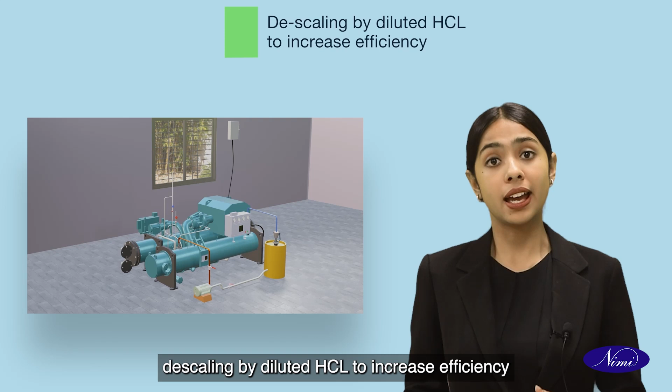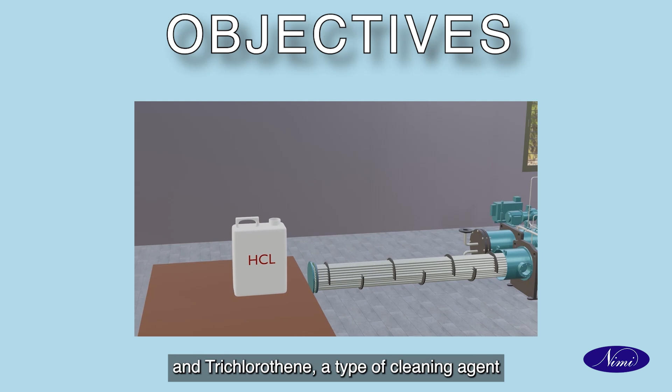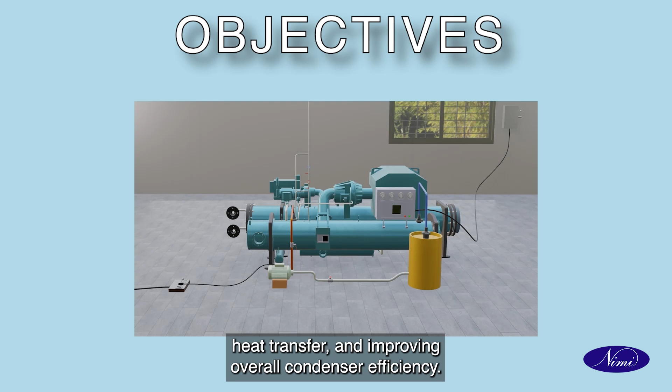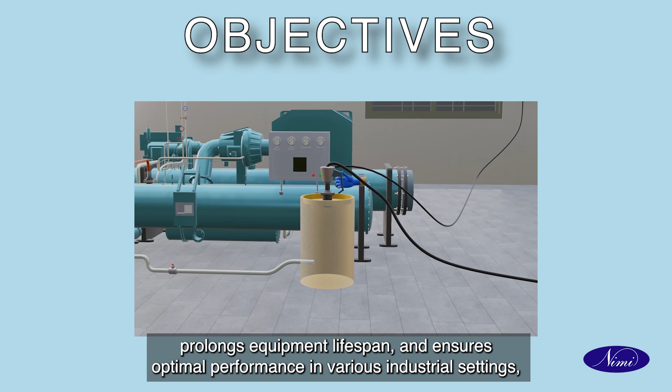Objectives: the objectives of descaling a condenser with diluted hydrochloric acid and trichloroethylene, a type of cleaning agent non ozone depleting in use, are multifaceted. The process aims to remove mineral scale deposits, restoring unhindered heat transfer and improving overall condenser efficiency. By mitigating scaling issues, it enhances energy efficiency, prolongs equipment lifespan, and ensures optimal performance in various industrial settings, contributing to a more reliable and cost effective operation.

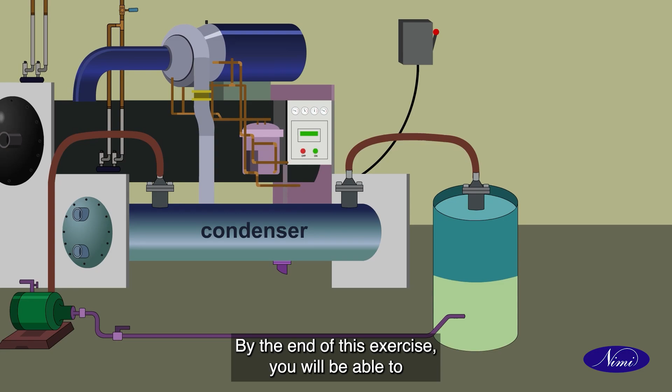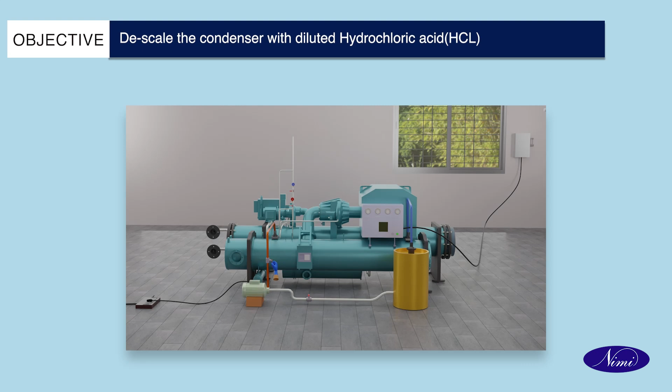By the end of this exercise, you will be able to identify the condenser connection joints, prepare the descaling solution, descale the condenser with diluted HCl, and follow the safety measures while performing descaling.

The descaling process with diluted hydrochloric acid requires a specific set of tools, equipments, and consumables. Essential items include acid-resistant gloves and goggles for safety, acid-resistant brushes for application, and pH testing equipment to monitor acidity levels. Now let us take a look at the tools, equipments, and consumables.

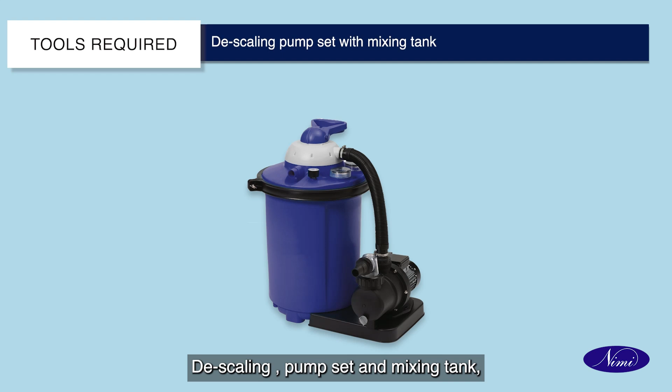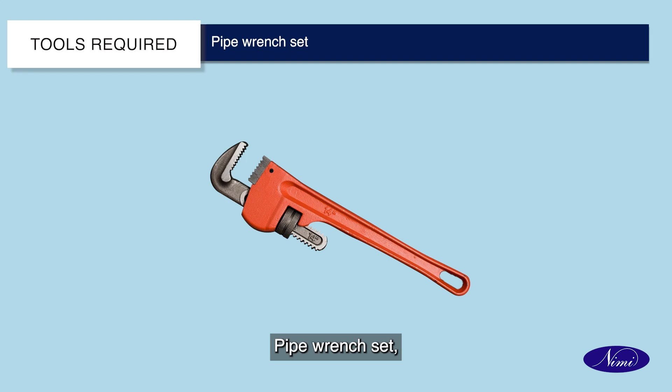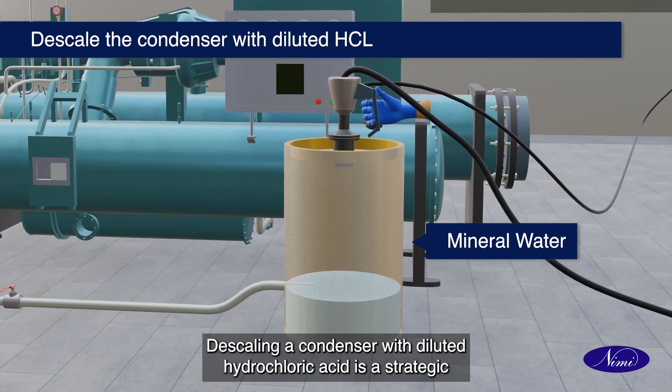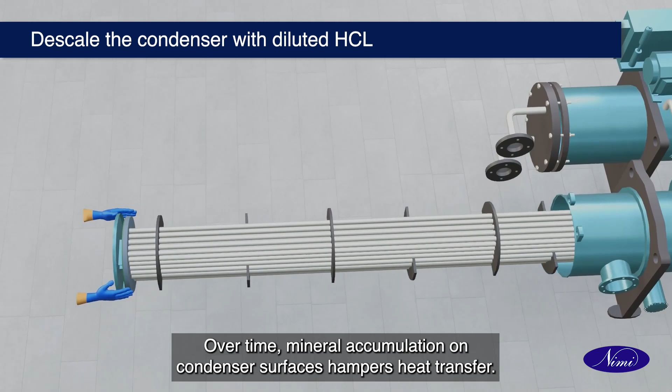Now let us see the preparations needed for descaling by diluted HCl to increase efficiency. Descaling a condenser with diluted hydrochloric acid is a strategic method aimed at boosting efficiency by mitigating scale deposits. Over time, mineral accumulation on condenser surfaces hampers heat transfer, diminishing performance. The use of carefully diluted HCl facilitates the removal of these deposits, restoring optimal heat exchange functionality and consequently enhancing the efficiency of the condenser in various industrial applications.

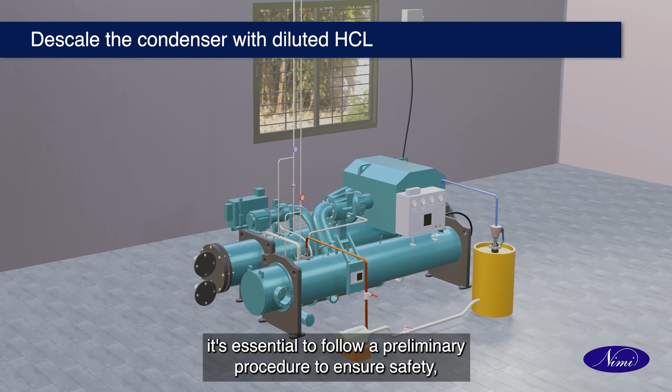Descale the condenser with diluted HCl. Before descaling a condenser with diluted hydrochloric acid, it's essential to follow a preliminary procedure to ensure safety, proper planning, and effective execution. Here's a step-by-step procedure to be followed.

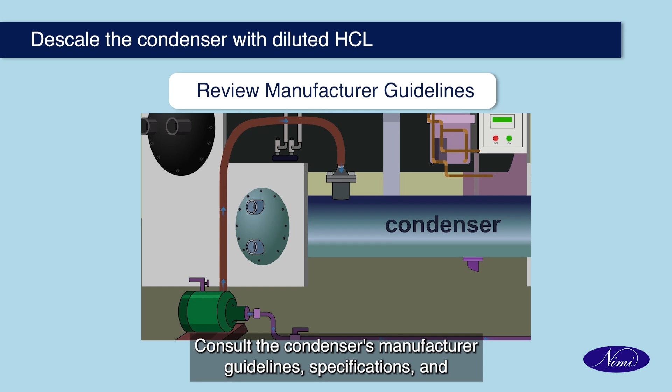Review manufacturer guidelines: consult the condenser's manufacturer guidelines, specifications, and maintenance manual to determine if descaling with HCl is recommended and safe for the specific condenser model. Follow any specific instructions or precautions provided by the manufacturer.

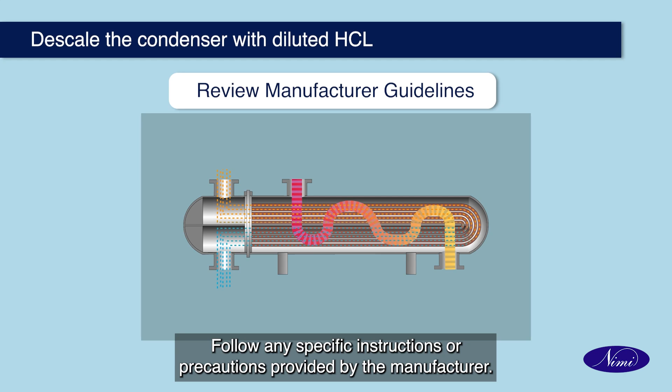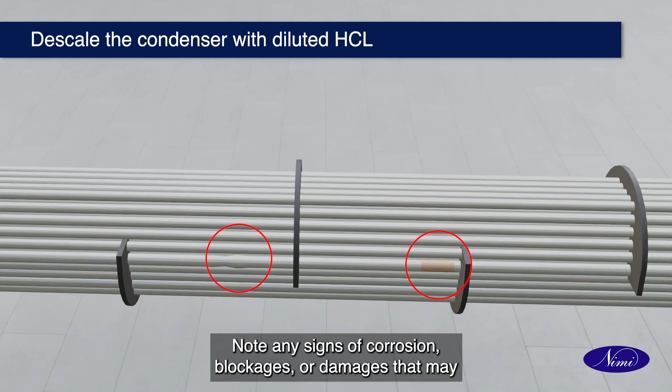Assess condition of the condenser: inspect the condenser visually to assess the extent of scale buildup or fouling. Note any signs of corrosion, blockages, or damages that may affect the descaling process.

Identify materials compatibility: ensure the materials used in the construction of the condenser are compatible with hydrochloric acid. Some materials, such as certain types of aluminum alloys or rubber gaskets, may react negatively to acid exposure.

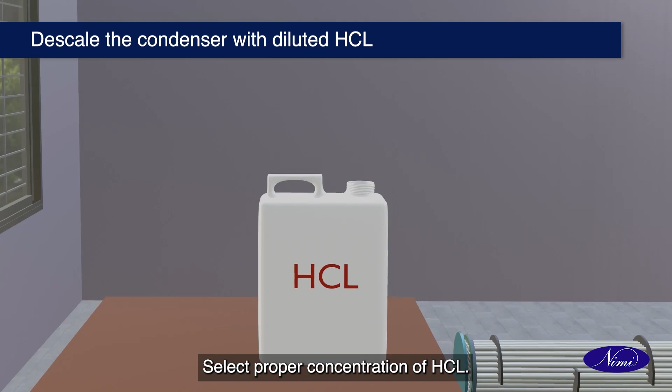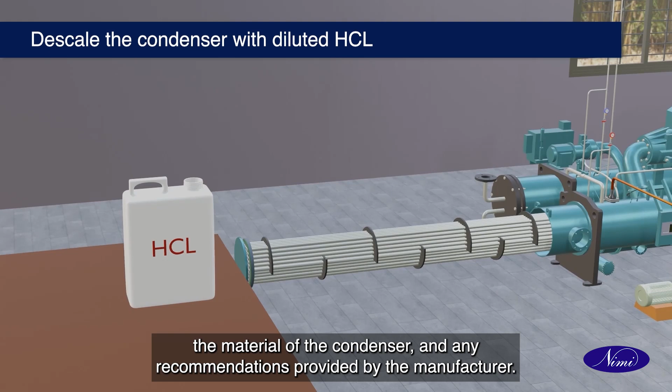Select proper concentration of HCl. Determine the appropriate concentration of hydrochloric acid solution for descaling based on the severity of scale buildup, the material of the condenser, and any recommendations provided by the manufacturer. Typically, concentrations ranging from 5% to 10% are used for descaling purposes.

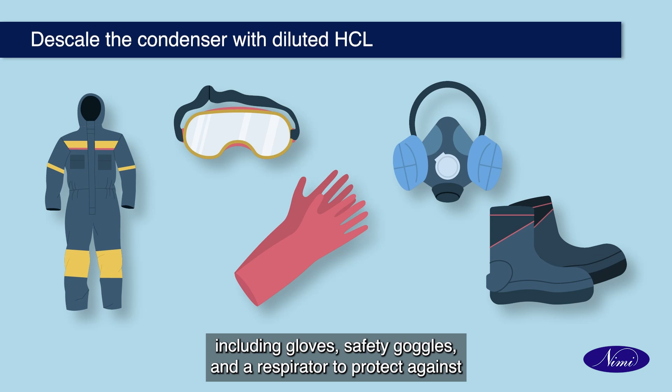Prepare safety equipment: gather and wear appropriate personal protective equipment, including gloves, safety goggles, and a respirator to protect against chemical splashes and fumes. Ensure that emergency eye wash and shower facilities are accessible nearby.

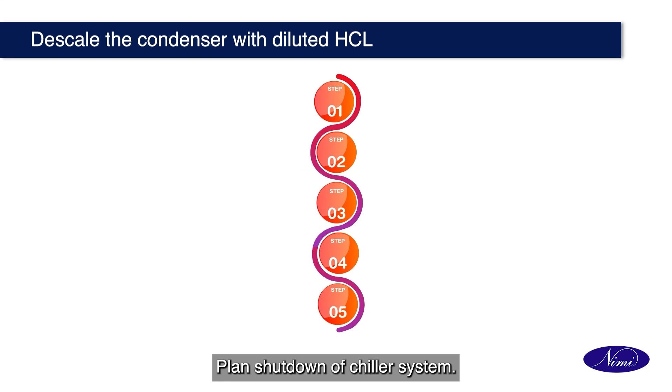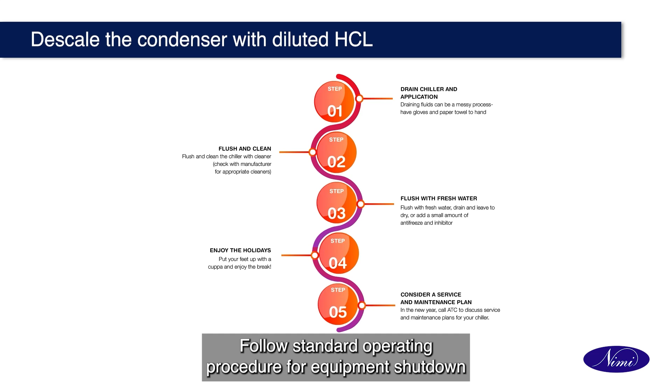Plan shutdown of chiller system. Safely shut down the chiller system and isolate the condenser from the rest of the system to prevent water flow during descaling. Follow standard operating procedure for equipment shutdown to avoid damage or safety hazards.

Prepare work area: clear the area around the condenser and ensure that it is clean and free from any obstructions. Place absorbent material or spill containment devices under the condenser to catch any spills or drips during the descaling process.

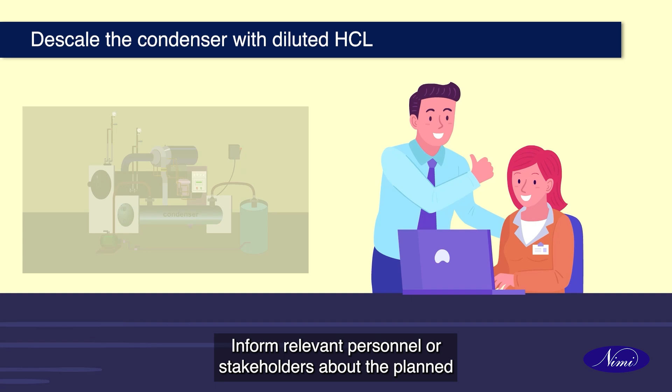Notify personnel: inform relevant personnel or stakeholders about the planned descaling procedure, including maintenance staff, facility managers, and any other individuals who may be affected or involved in the process.

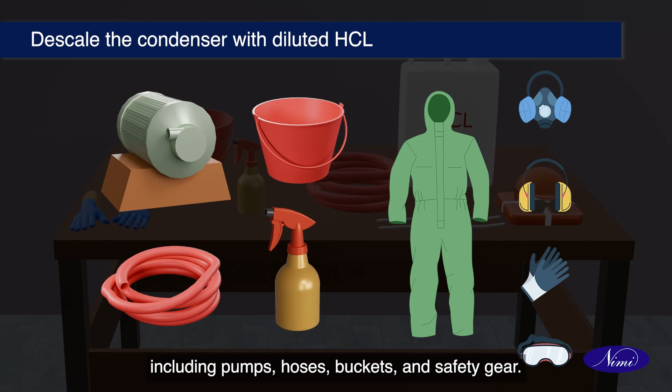Prepare equipment and tools: gather all necessary equipment and tools required for descaling, including pumps, hoses, buckets, and safety gear. Ensure that all equipment is in good working condition and readily accessible.

Procedure for descaling: connect the acid circulating system to the condenser. Fill the mixing tank with clean water up to 3 by 4 level. Connect the acid circulating pump motor to the power supply.

Open pump suction and delivery and vent valves. Start the pump and keep filling the mixing tank to maintain half level till the water returns back to the tank through the vent line.

Stop cleaning water filling. Calculate roughly the water hold-up quantity in the system. Add commercial grade hydrochloric acid to the mixing tank in the required quantity to maintain a 5% solution of water and acid in the mixing tank.

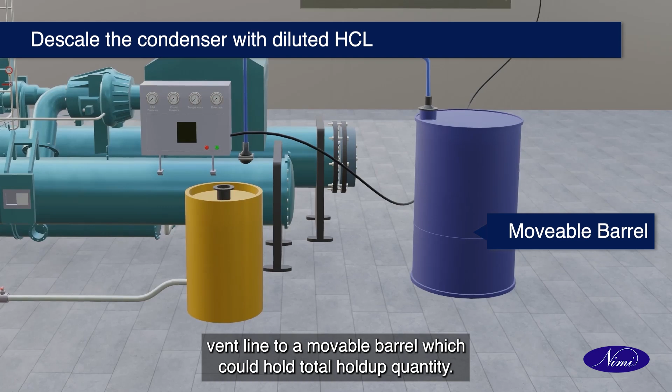Circulate for 4 hours. After completion of 4 hours, connect the vent line to a movable barrel which could hold the total hold-up quantity. Drain the system quantity to the barrel by operating the pump. Fill the mixing tank with fresh water and circulate.

Check the pH value of the vented water till it rises to 7 to 7.5; water to be added if it reaches a lower pH value. Stop the circulation. Drain the mixing tank and hold the water in an area outside the building.

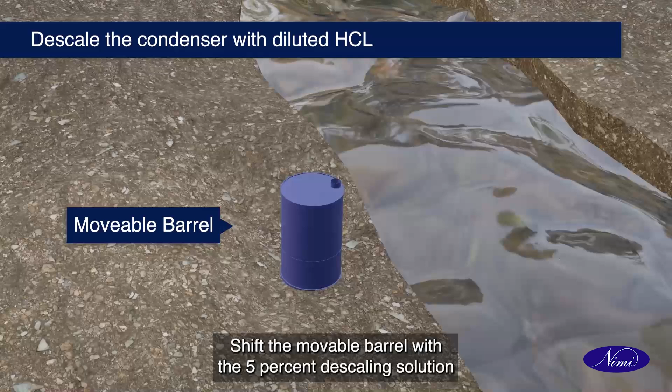Shift the movable barrel with the 5% descaling solution to a safe place outside. Pour it down and pour fresh water. Disconnect the descaling system and maintain safety measures.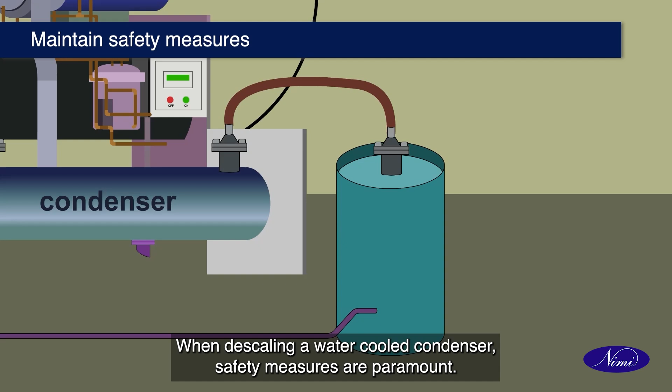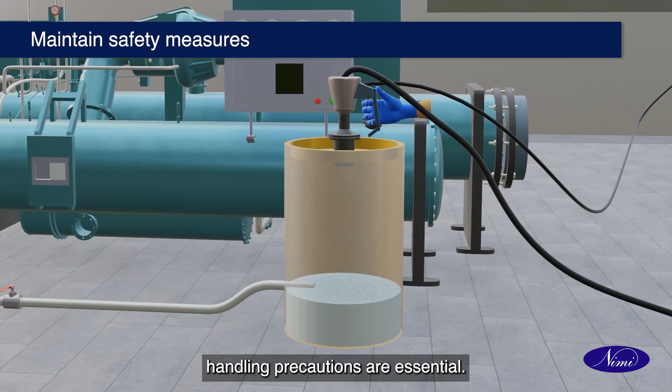When descaling a water-cooled condenser, safety measures are paramount. Personal protective equipment, including gloves, goggles, and a respirator, must be worn, while adequate ventilation and chemical handling precautions are essential. Proper dilution of descaling chemicals, isolation and shutdown of the chiller system, and vigilant monitoring throughout the process are crucial to mitigate risks effectively.

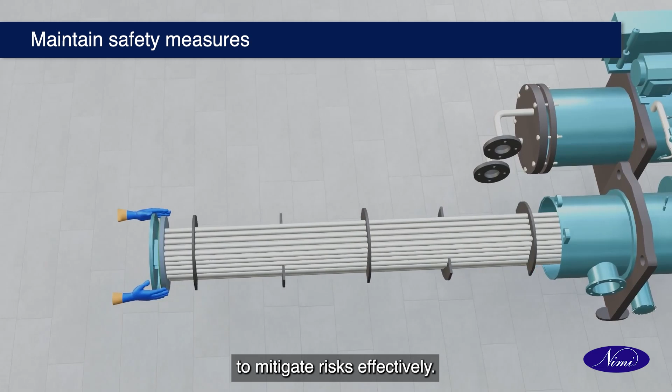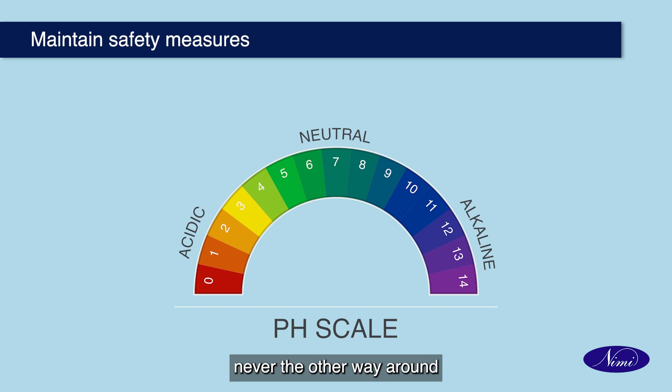Here is the safety measure to be followed during the descaling process. Remember the cardinal rule: add acid to water slowly, never the other way around, to prevent hazardous reactions. Ensure eye protection by wearing goggles as a safety precaution. Protect your hands by wearing gloves as a safety measure.

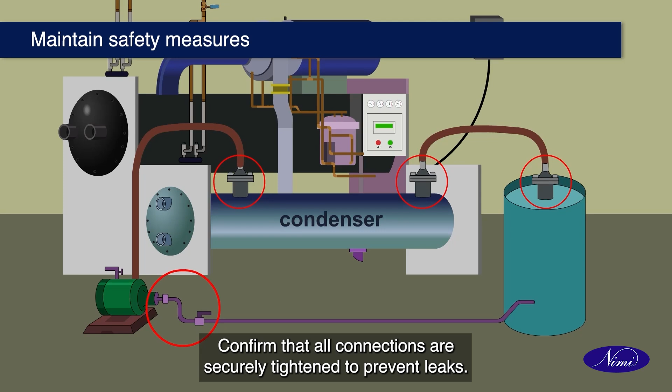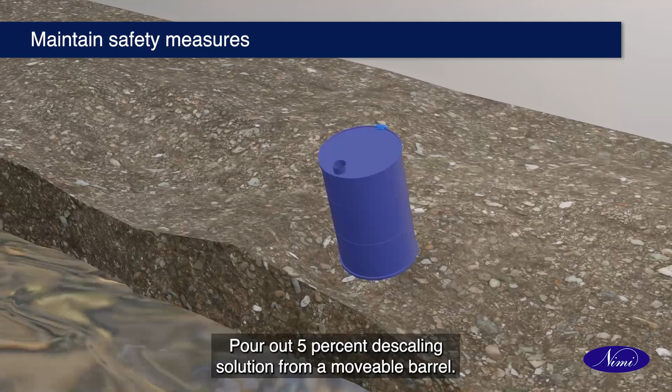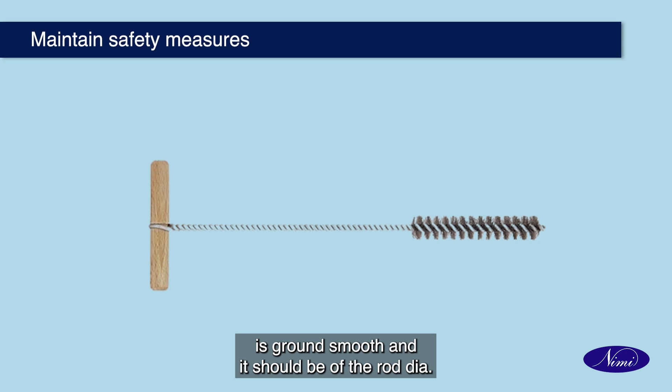Confirm that all connections are securely tightened to prevent leaks. Ensure the acid descaling system tank is not allowed to overflow. Prevent spills by monitoring the tank's level closely. Pour out the 5% descaling solution from the movable barrel to an isolated place or into a large canal of flowing water. Ensure that the welding joint from brush to rod is ground smooth and matches the rod diameter.

Descaling a condenser with diluted hydrochloric acid, HCl, is a targeted approach to enhance efficiency. By removing mineral scale deposits, the process restores optimal heat transfer, addressing performance issues. The use of acid-resistant tools and safety equipment ensures a controlled and safe descaling operation, contributing to prolonged equipment lifespan and improved energy efficiency in industrial applications.

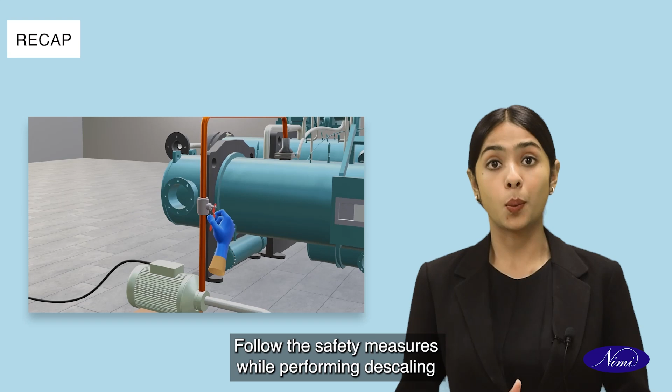In this topic, we came to know about how to identify the condenser connection joints, prepare the descaling solution, descale the condenser with diluted hydrochloric acid, HCl, and follow the safety measures while performing descaling.